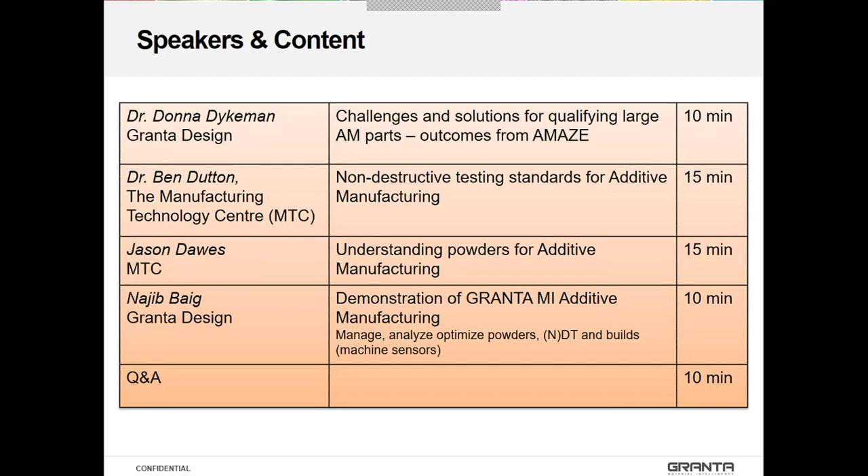Thank you very much, Steve. The title of these slides is the challenges and solutions for qualifying large AM parts, some outcomes from the AMAZE project. The purpose of the next few slides is to give an overview of the AMAZE project, its purposes, and the challenges it addressed. We won't cover all the outcomes of AMAZE today - this is just a snapshot of work that Granta and MTC worked on. We'll come back at the end of the webinar and share resources to help you find more information and connect with more partners.

To introduce AMAZE: this acronym has been around for several years, standing for Additive Manufacturing, Aiming towards Zero waste and Efficient production of high-tech metal parts. This is the largest and most ambitious metal additive manufacturing research project in Europe, funded to the level of 18 million euros on behalf of the European Union's Framework 7 program. Because it was focused on demonstrations, it was also funded in part by industry. The project was 4.5 years long, starting December 2013 and closing in June 2017 with an open forum held at the MTC.

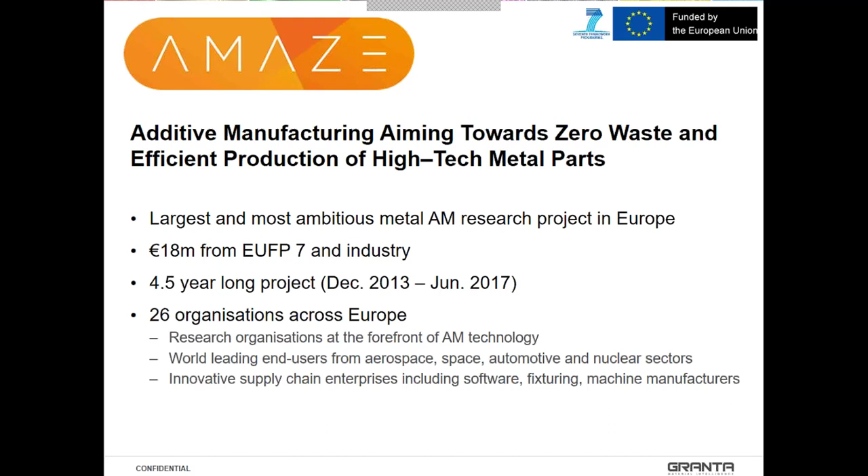The AMAZE partnership consists of 26 organizations across Europe. I'm just going to flick to the next slide while I talk about the partnership so you can have a chance to absorb exactly who was present.

AMAZE brought together a representation of the leading institutes and enterprises in Europe for additive manufacturing. To start with, there's a good presence of research technology organizations and universities who worked with partners on fundamental research problems, as well as how to translate these solutions to industry use. Secondly, we were well represented by world-leading end users who brought their business cases and challenges to the consortia, representing the aerospace, space, automotive, and nuclear sectors. Thirdly, we had strong supply chain representation from designers, software developers, machine manufacturers, post-processing, NDT and metrology, and fixturing.

The project aims overall could be summarized in four short statements, although there's a lot of work going into each of these. They are: increasing the build rate of AM processing, extending part size and complexity, improving part quality, particularly by reducing defects and scrap, and widening the range of proven materials for additive manufacturing.

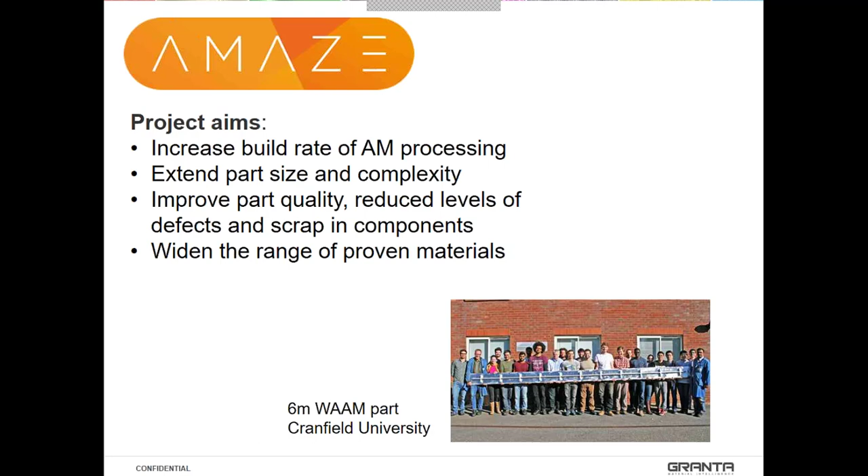The benefits of additive manufacturing really don't need to be widely explained today, given the work done globally on this topic over the past decade. They are widely acknowledged as being geometrical freedom, production flexibility, efficient use of materials, and material freedom.

I'm showing another couple of the demonstration use cases that came out of AMAZE. One is the Thales satellite sun sensor, which was originally made of 3 tubes and was redesigned for geometrical efficiency, reducing the amount of material by about 52%. There were very significant environmental and cost impacts that followed from those decisions.

The other one shown here was made by the UK Atomic Energy Authority, a copper and vanadium component, both of which are typically difficult by additive manufacturing, but they came up with a way to do it. What it gives them is a lot of flexibility in the field, and these materials are particularly needed in their harsh environment in the energy sector.

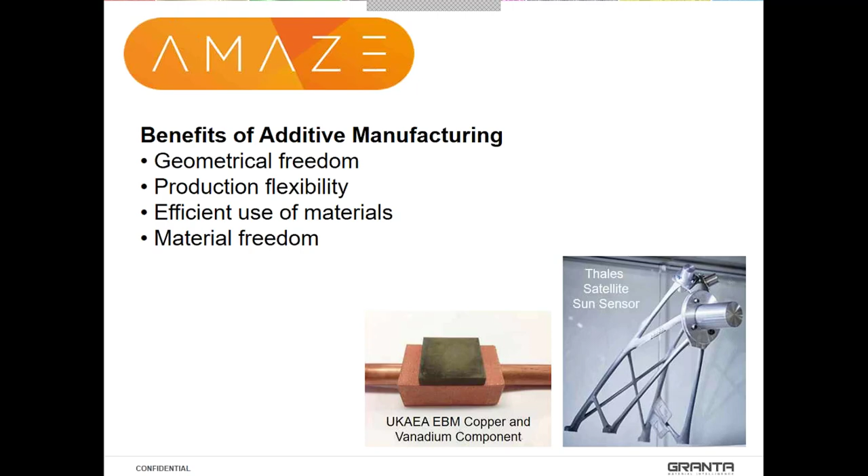Moving on, some of the barriers to introduction of AM for production highlighted by our partners even at the onset of the project are what we aim to address. One is the limited range of proven materials and associated mechanical property data. There is data out there which we have as product offerings, but the industry as a whole acknowledges there's a lot more work to be done to get qualification-level data available to industry.

We would say there's probably still a poor understanding of opportunities and requirements for design for AM. Obviously not all parts are AM applicable, and there's also a lot of value add in terms of finishing applications and repair applications that AM can offer.

There's limited knowledge of fundamental principles which underpin the AM process. A lot of work was done in the project looking at the melt process, measuring and modeling it, which is very important for improving resource efficiency and improving feeds and speeds.

Another part of this knowledge base is what's happening with your feedstock material, and that's what we have the MTC here to talk about today. The quality that comes in is going to be reflected in your part quality at the end as well, and this important part shouldn't be forgotten.

Finally, given those barriers, it's fairly self-evident that a lack of industrial case studies to demonstrate the process benefits and limitations is available in the public literature today. AMAZE really targeted that opportunity, and it looked at 15 different use case studies where parts were designed and produced.

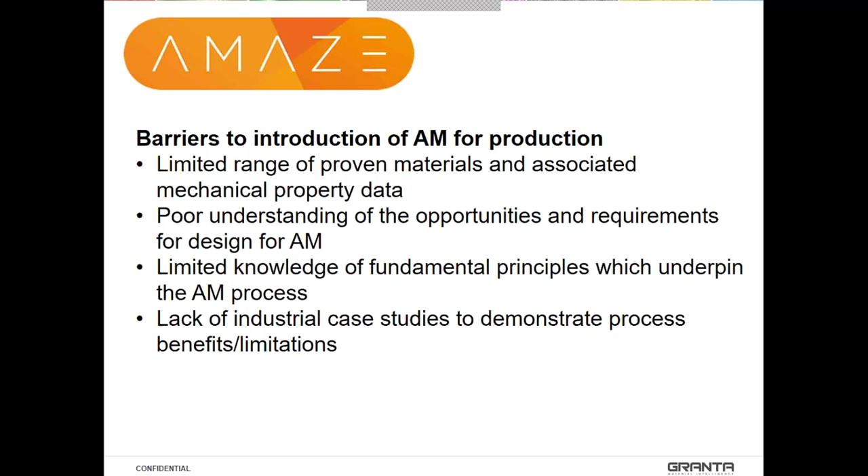The AMAZE objectives overall were to produce large AM metallic components, increase process productivity, reduce defect scrap levels, reduce cost of finishing parts, and improve in-process and ex-situ inspection methods. I'm showing another part here below, a pylon bracket. It actually underwent laser polishing, which was developed in the project, and it also underwent some more design optimization techniques as well.

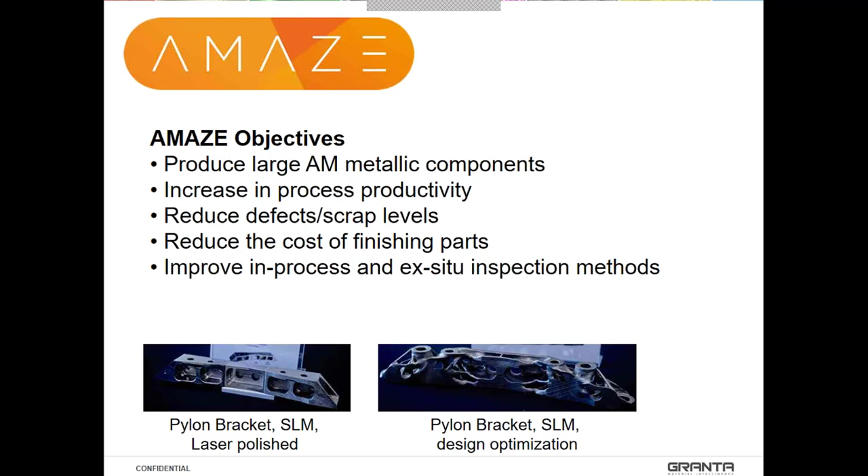So the scope of the project was structured around the limitations that industry had brought to us as a challenge, and also the critical objectives I talked about earlier. The result was the development of a robust end-to-end additive manufacturing process chain. The components of that process chain are part design for AM, materials research, high productivity AM process development, process modeling, process monitoring and control, finishing of parts, final inspection, and developing integrated and streamlined AM factory solutions.

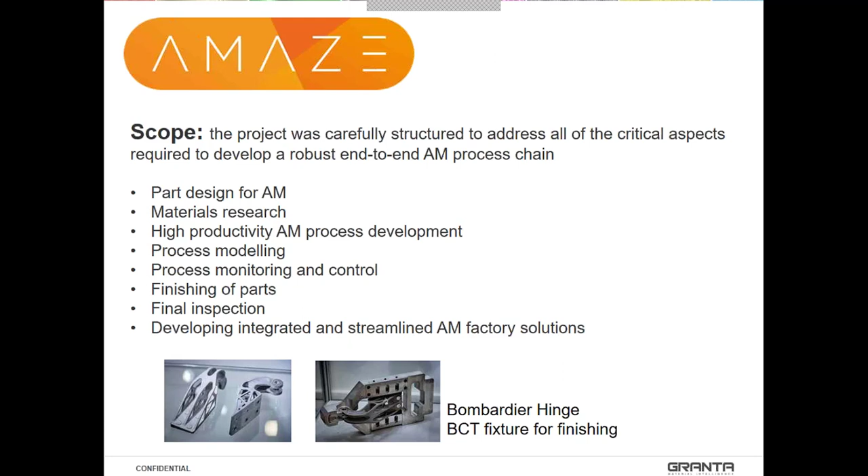So what we're going to talk about now for the rest of this session is some of the outcomes developed by the MTC and Granta, and how they overlapped onto this end-to-end AM process chain. In the materials research area, there's the feedstock characterization and control for qualification work that the MTC has done, as well as NDT and metrology applications for process monitoring and final part inspection. For Granta's part, we hosted a centralized materials data management database for the project, which looks at an industrial level application of materials information to support factory solutions, and also captured all the information through that end-to-end process chain for the project, which will have a life after the project, as we'll talk about.

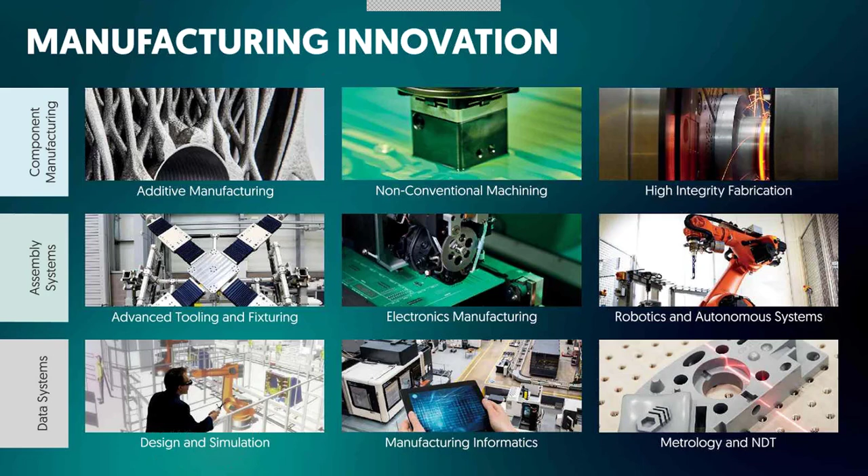The MTC is divided into three main large groups. One includes additive manufacturing, non-conventional machining, high-integrity fabrication - that's for component manufacturing. Then we have assembly systems, which includes advanced tooling and fixturing. We have a big group on electronics manufacturing. We also have robotics and autonomous systems. And the last one at the bottom is data systems, which includes design and simulation - we have a nice VR room and other related equipment - and informatics, manufacturing. Where I personally sit is in metrology and NDT, the last one on the bottom right.

About additive manufacture, we do quite a bit here at the MTC. We're the home of the National Centre for AM, and we have end-to-end capability, from design, powder characterization, to fully finished high-integrity components. We are a risk-free independent environment, meaning we're not tied to any particular company. We are a member-based company, but we are independent, and that's one of the advantages we have - we can give free advice that's not tied to any particular company.

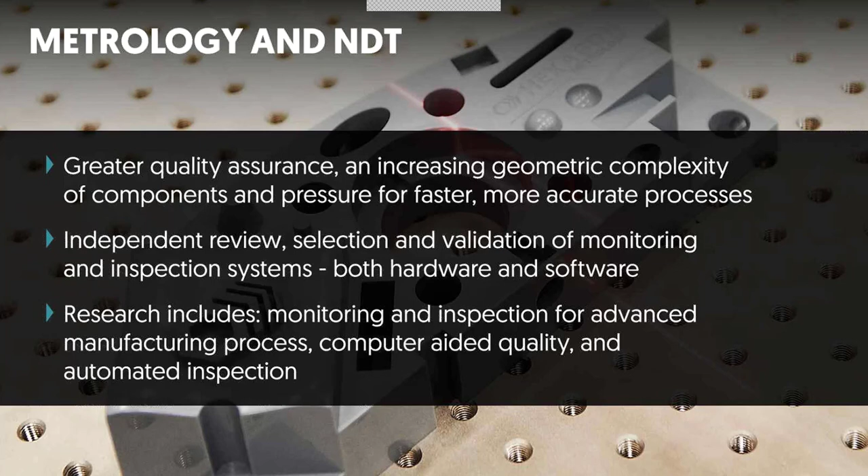So just a bit more now into the group I belong to, metrology and NDT. My background is NDT, and what I'll be talking about now is NDT. We have quite a variety of expertise and project work that we cover.

Now, right into the actual subject, which is NDT standards for additive manufacturing. Additive manufacture is a great tool and way to design very complex features or parts, as you see in some examples there, and there are even more complex lattice sections designs. But for NDT, that is a headache basically. There's particularly the freedom of geometry, and added to the roughness of the finished parts, these are causing challenges to the NDT.

There's a need to improve NDT, or to have novel NDT basically. Some of the main areas that, from our knowledge, require standards are aerospace, automotive, and medical. There are others which also do, but those remain what we believe.

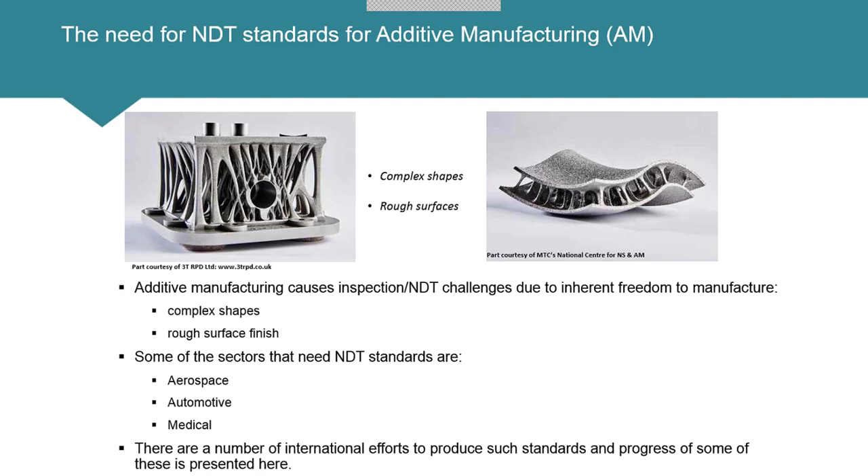There's a number of international efforts producing such standards, and a big one is the one that I'm leading. I'll be presenting that here, and mentioning another one that's also participating. The standard I'm leading has a big long name, as you see on top. It's basically a joint effort between ISO and ASTM, and our activities go through BSI, the British Standards Institute. The standard is going to come out from both ISO and ASTM, and I'm the convener.

This is a best practice guide, as we're starting to define it, because that's typically what you do when you don't have a very well-defined method to inspect a very complex part. AM is so complex that NDT methods can vary quite widely. So it's a guide which represents potential, and then tested, NDT methods to detect defects which are not covered by current standards. I'll explain what that means.

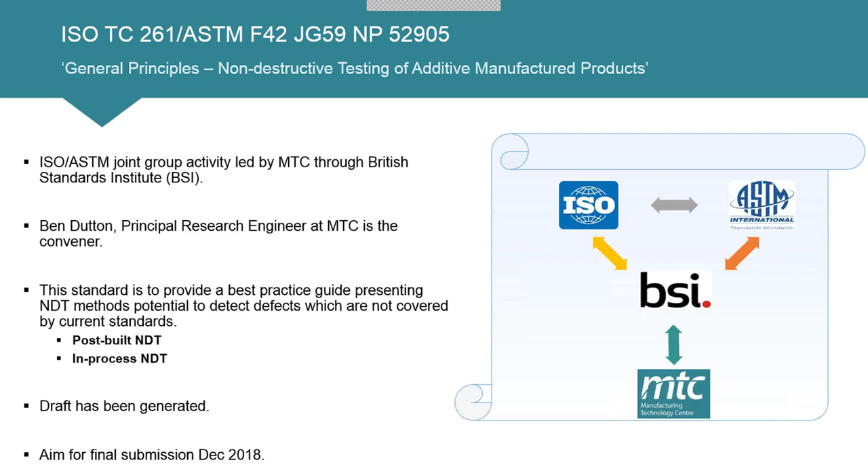It covers both post-build and in-process NDT. The first draft has been generated, submitted, and approved as a project, and the aim for final submission will be around December next year.

A couple of slides on the types of defects, which we've generated mainly from research projects at the MTC, and most of them also from AMAZE basically. So these are some of the defects that we find, only believed to be in additive manufacturing.

These are typical powder bed fusion defects—some electron beam melting, some laser powder bed fusion. This is to highlight defects like cross-layer defects, shown in these X-ray CT images. It's a vertical cut on the left and a build layer slice on top, just to show the morphology of defects which typically don't occur with other methods.

Then you've got layer defects, and we also have powder bed issues: trapped powder and unconsolidated powder. Trapped powder is powder that, due to the geometry it was designed with, gets trapped, and it may or may not be a problem, so we may need to detect it. Unconsolidated powder is powder that you meant to melt but, for some reason—process errors—didn't.

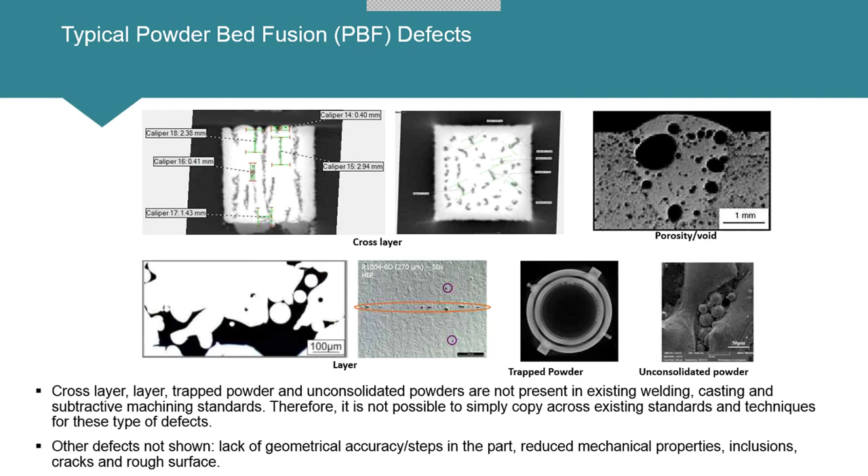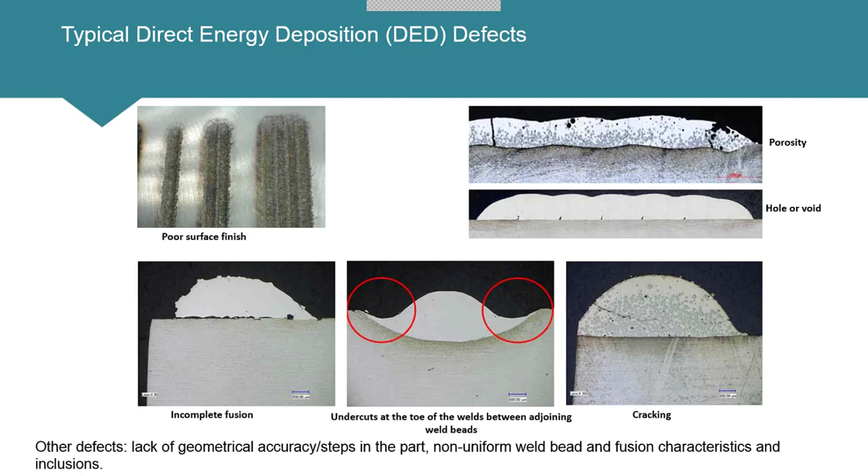Now in direct energy deposition, these are some examples of the types of defects that occur. You typically get poor surface finish, then porosity, then undercuts because of the size of the beads typically, and you could have incomplete fusion and cracking.

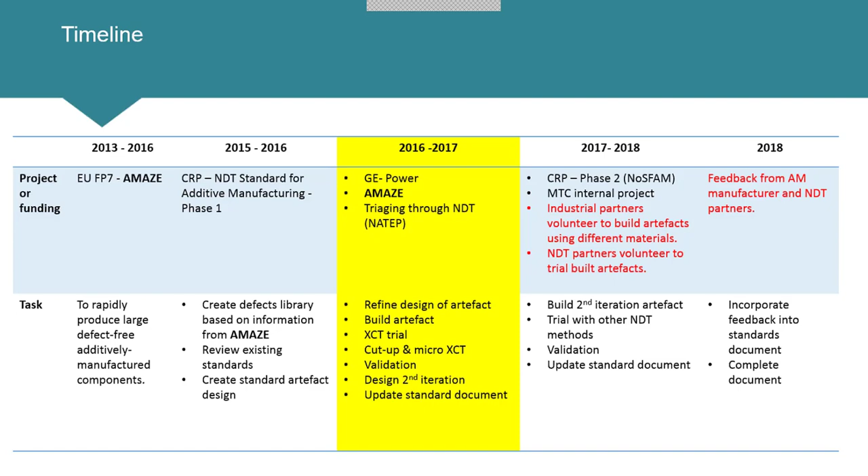More detail on the scope and definition of the standard: we look at the types of defects that additive manufacturing generates in both powder bed fusion and direct energy deposition. We reviewed current standards, mainly welding and casting. Welding has similarity to direct energy deposition, and we saw it has similar defects, so we believe most DED defects can be covered by current welding standards. Powder bed fusion has more unique defects, which compared to casting, we believe some can be covered by current standards.

Provided we can validate them, but also considering the finish of the part and the geometry, which typically in casting cannot be that complex. And then you have the very unique defects, which need very specific standards.

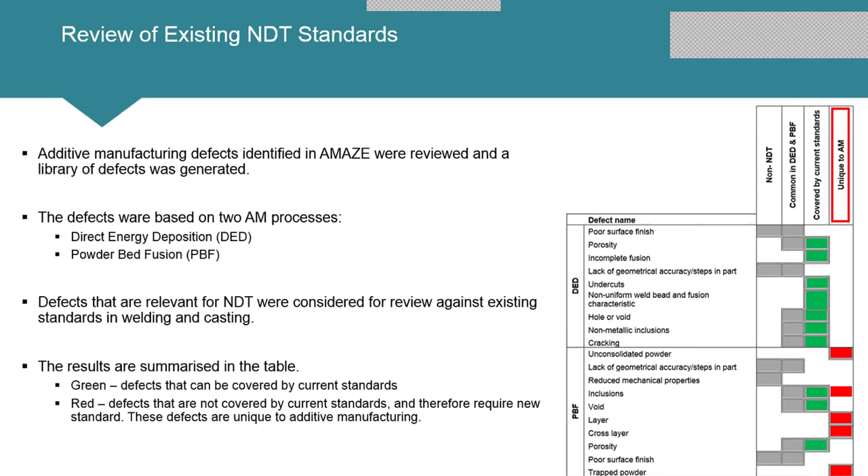So the structure of this standard is as you see in this slide. Depending on the part, the level of quality required, and acceptance level, some of the defects can be covered by the current standards, which is the blue section. For defects depending on acceptance requirements, some will need new NDT standards, which are the new standards that will be developed.

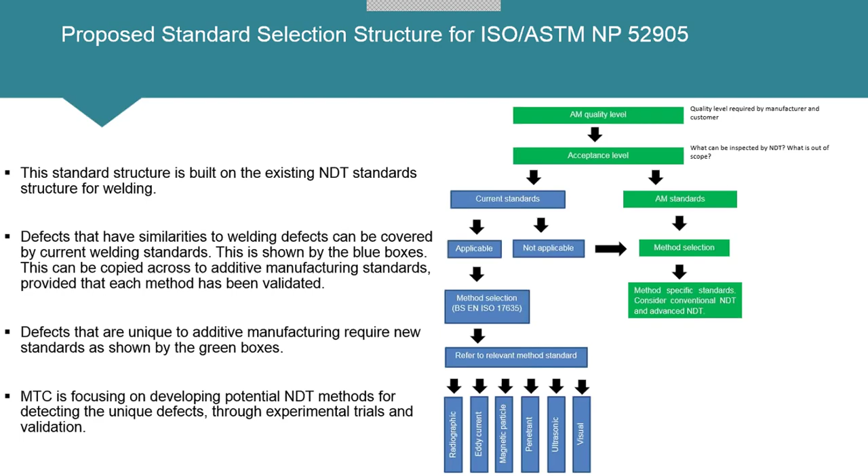Apologies for the size, I don't know if you can read that. I couldn't fit it all in, but this is something that will be included in the standards. This is a table showing the potential of NDT methods for each of those unique additive manufacturing defects. The size of the green bar is the estimated potential for detecting that particular defect using a particular NDT method.

We made it an estimate, which we could modify based on the roughness of the sample. In this case, it's the worst case. Typically, electron beam melting is rougher than laser powder bed, and there's also geometrical complexity. So here we put the worst case, which we believe is lattice structures. This is a matrix we generated which depends on the level of surface roughness and geometrical complexity—it'll give you different outputs.

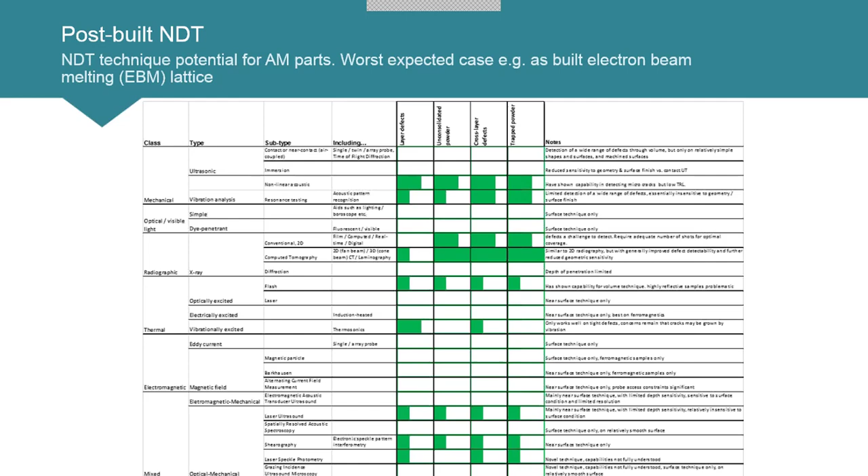Now, for the standard, we have created an artifact, as you see there. This covers the post-build NDT section, and we decided on something somewhat complex, but with areas we can define with different kinds of defects. In some areas we have horizontal cylinders, and then we have vertical cylinders.

Those were seeded, mimicking the types of defects which are layer defects or cross-layer defects vertically. Then we have spheres, which is basically trapped powder, and cylinders, which are trapped powder at different angles. This design is dependent on the material because we're trying to optimize for X-ray CT, basically with a 10% transmission rule.

Then we have the actual builds that we have done, one for Inconel and one for titanium. We have a number of those artifacts, and the sizes are relative—it is the true proportion basically. So titanium would actually be larger because it's less dense, because of the rule we're following for 10% transmission.

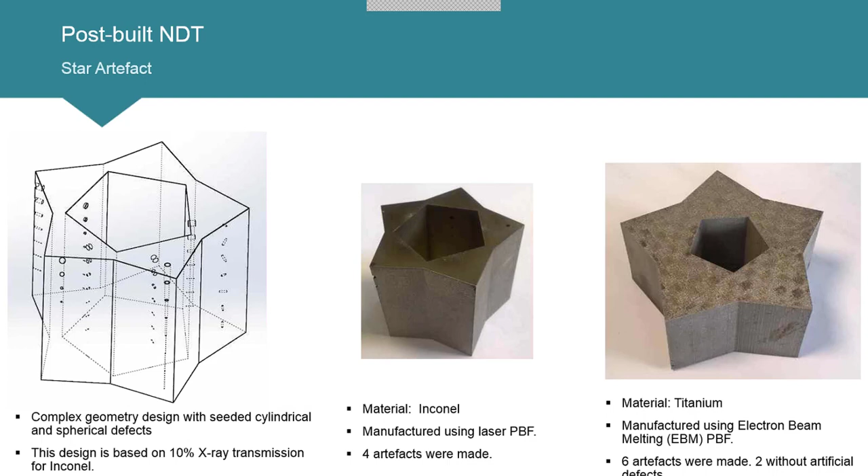Next I'm going to show you just one example, because otherwise I would take several hours showing you some of the results that we have, some of which will be included in the standard. This is X-ray CT, different projections of the artifacts which were scanned. There were one, two, three, four stacked stars, as you see on the top right stacks, and then the 3D image on the bottom right.

Then just a slice of where those vertical cylinders were concatenated, and we can see that the three largest ones were easily detectable. The one about 200 microns started to get more faint. But we've also cut up some of those, and that 200 micron feature is much better detailed than you see here—that's due to the limitation of the X-ray CT resolution. So that 200 microns is possible to detect, it's just not as clear as shown here.

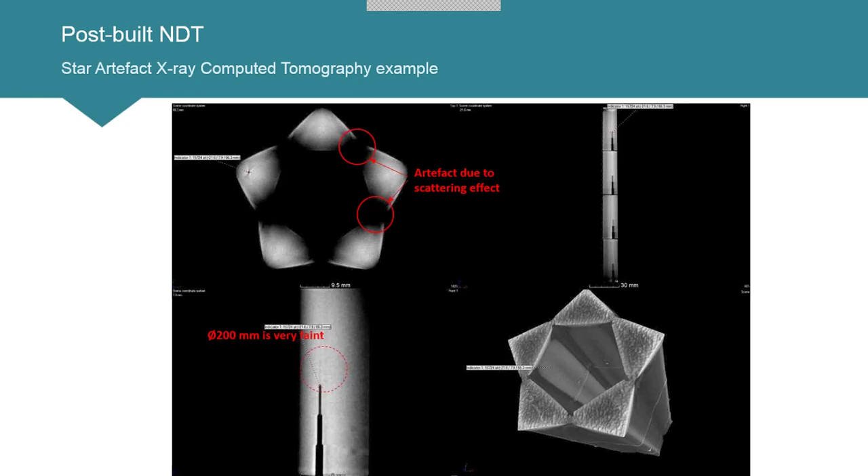Some other thing I'm highlighting is that X-ray CT has some difficulties, let's say, with artifacts. In this case, I'm showing artifacts due to the scattering of the sample. This is a very dense part, which makes these artifacts more visible.

The other thing we are also considering in the standard is that we have these artifacts, but perhaps in most cases, depending on the geometry, it will not be representative of that particular part you're building. So for those cases, the recommendation is to create what we call an 'a la carte' artifact, which is closer to the geometry you'll actually be building.

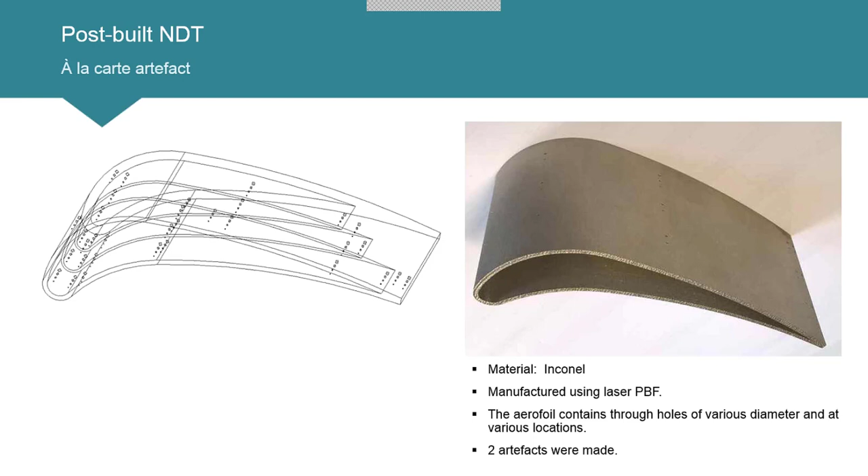This is thanks to one of the partners working with us, GE Alstom, GE Power. This part is not confidential, and it's not the geometry they are actually going to build, but it's representative of what they would like to test. So we built that and we have also X-ray CT'd it. I won't go into those details, but this is just to show that the standard is assessing the level of complexity that will obviously occur in AM.

Just a couple of slides on in-process NDT, which was developed during the AMAZE project. This is the same part that Donna showed, called output 3, the Thales part. This is an aluminum part that was built, but in this case it's showing the process was not under control, which in some way is good for NDT, because we like to see defects and test if the method is capable.

The first test on top is a crack, or in this case a surface defect, which is a layer defect because it's along the build layer. So it's an opening surface crack, and we scan with laser ultrasound just before and after that defect. This was the generation laser and this was the detection laser, and both move along this direction, moving downwards here. This is called a B scan, a stack of A scans that ultrasound generates. We can see the surface Rayleigh wave very clearly, and then some effect of that crack.

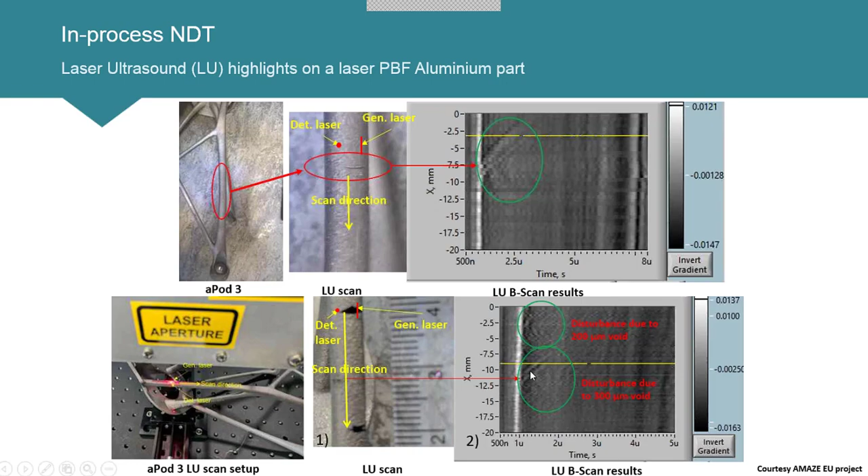The other example from the AMAZE project is a plasma transfer arc system with wire feed, with at least two beads deposited in parallel. I asked for the sample to have representative defects, and they told me there were sections with some lack of fusion between the beads.

What I'm showing here is again the B scan, and this is the direction of the scan. One laser was on one bead, the other laser was more or less on the peak of the other bead, and here's the B scan of that. The scanning is from top to bottom, and this area has a large effect on the delay in the Rayleigh - the surface Rayleigh wave - but there are also some features here which I believe are due to deeper defects.

I presume these are from possibly porosity or lack of fusion between the top and bottom beads, or the top bead and the plate. This shows a large difference in the A scan between when there's a defect and when there's no defect. So this laser ultrasound system is showing capability for both powder bed and for the potential for in-process inspection.

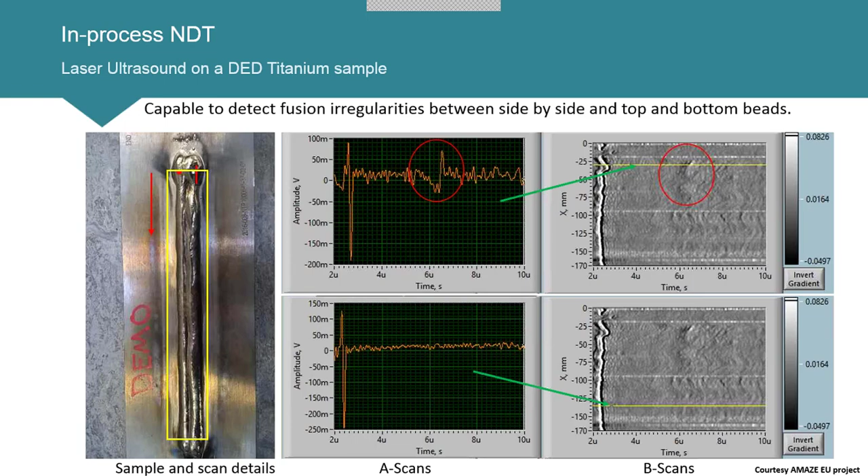In general, the contributions of AMAZE for these standards are the joint group which I'm leading, the new work item proposal 52905, joint group 59. I'm also participating, and the types of defects were used on the ASTM work group E07.

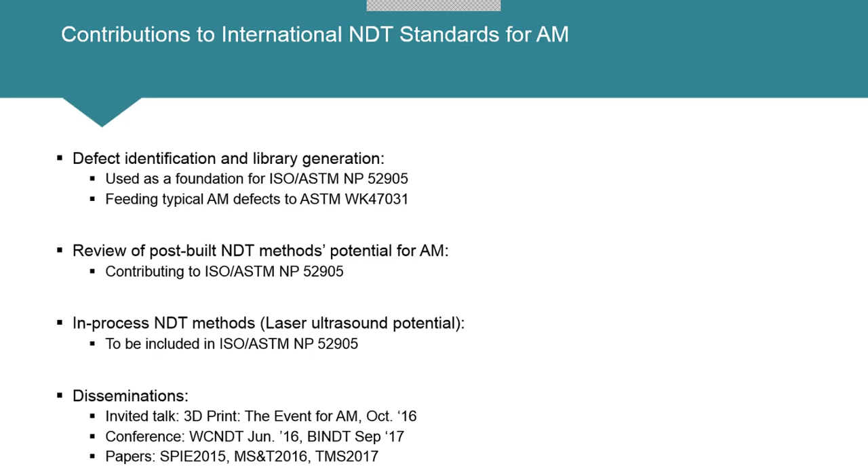Obviously AMAZE has also been useful to review the inspection methods and the process, as I just showed you, and obviously also some dissemination, as you see at the bottom.

In conclusion, MTC has been leading the development of NDT standards through ISO and ASTM, and a lot of this has been due to the advantage of working with the AMAZE project. But I believe more effort, and ideally joint effort, is required to provide what this industry or these sectors urgently require.

Without NDT standards, there are obvious difficulties in certifying and verifying parts - it's quite an issue. The challenge for NDT is that we require novel methods to cover both post-build and in-process inspection. In-process may have the potential to reduce or eliminate post-build inspection - at least that would be the best solution or goal to aim for. So, in addition to novel methods, improving the existing ones would perhaps be the solution.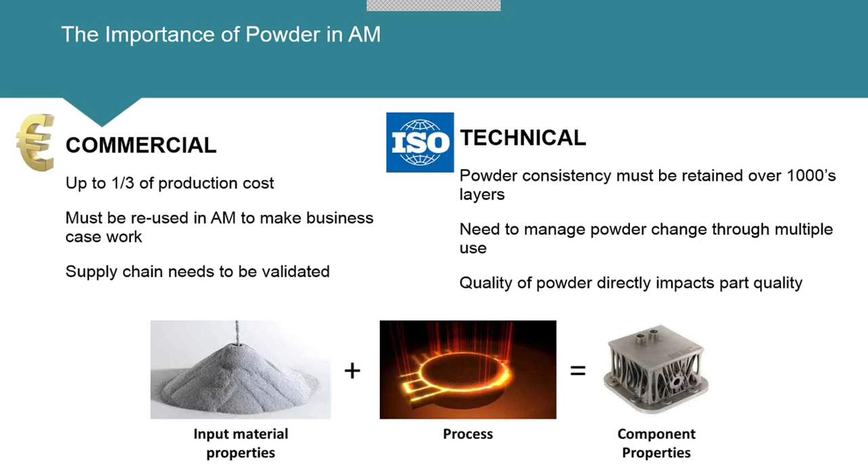Eventually you will pick up too much oxygen, you'll be out of spec. So you've got to understand how to manage the reuse of powder in the AM process. And then, of course, you've got the old adage where quality of powder directly impacts part quality. You put rubbish powder in, you're going to get a rubbish product out.

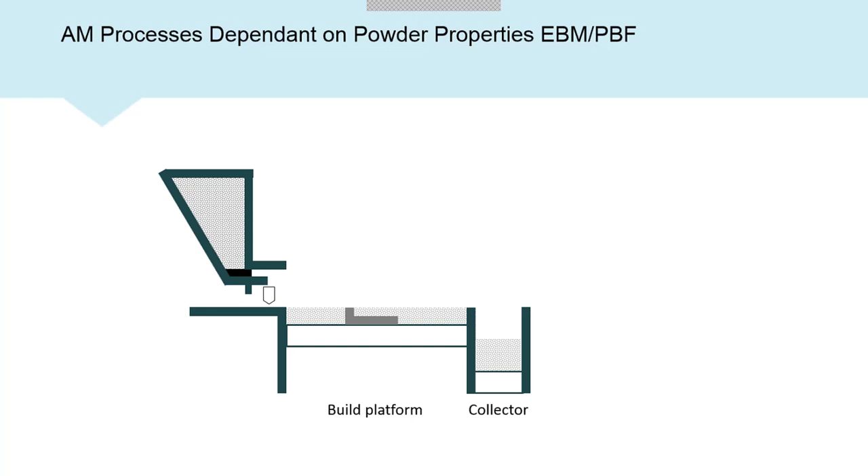In terms of the EBM process or an SLM process, I've just got a generic image on the slide that gives you an overview of what an AM machine looks like in very simple terms. If you look at the different stages of the process, you can start to understand where powder starts to impact. Firstly, you've got powder storage.

In this scenario, bulk density becomes important, because the lower the bulk density, the less material you can store, or the bigger container you're going to need to store the powder in. Moisture content, because that could cause bridging in the hopper. And then particle size distribution - ideally you'd want no segregation, so you've got the same distribution from top to bottom.

At some stage you need to dose your powder from that hopper into a dosing unit. So then I'm interested in powder flow - will my material reliably flow from my storage hopper in front of my spreader? Will I get the same amount every time? Again, particle size distribution - will I be seeing any kind of segregation, which could give me varying part property from bottom to top?

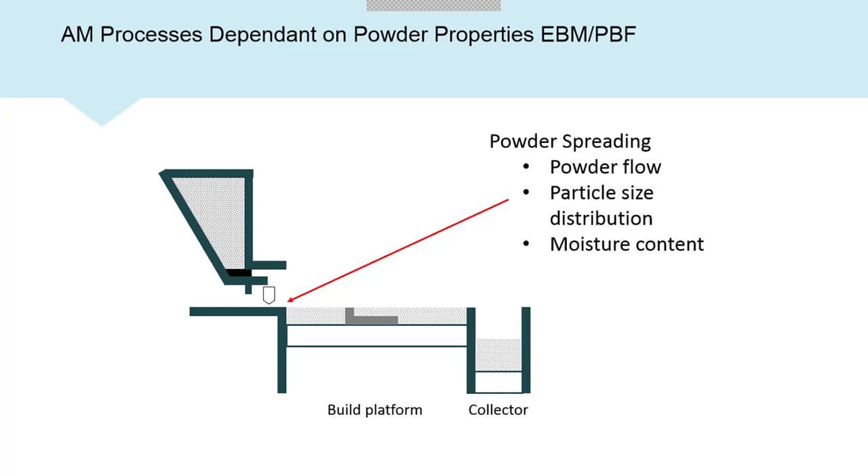I then need to spread that dosed powder. Again, what I care about now is how easily will my powder flow. Will it lock up and not spread efficiently? Will it be too free flowing and spread too much? What I want is a very nice uniform flow of powder across the build table. Again, particle size distribution, and again, moisture content, because that's the kind of thing that's going to start to affect how it flows.

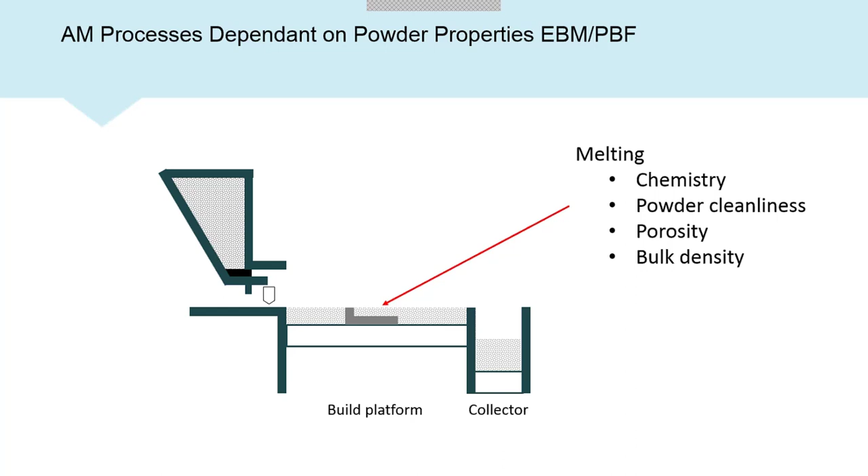Then when I actually want to melt the material, I care about the chemistry. Have I got the correct chemistry? Is my powder clean? Do I have any particulates in there that are foreign to the bulk? They're going to cause me inclusion issues. Porosity - how densely packed is that powder bed - and bulk density.

In terms of powder quality, how do we define powder quality? I like to say there's four things that you might want to measure about powder quality. Firstly, you've got your particulate properties - we're interested in particle size, particle morphology, porosity. How solid are my particles - are they solid, or do they have entrapped air in them? And of course, we're interested in the metallurgy of the particles.

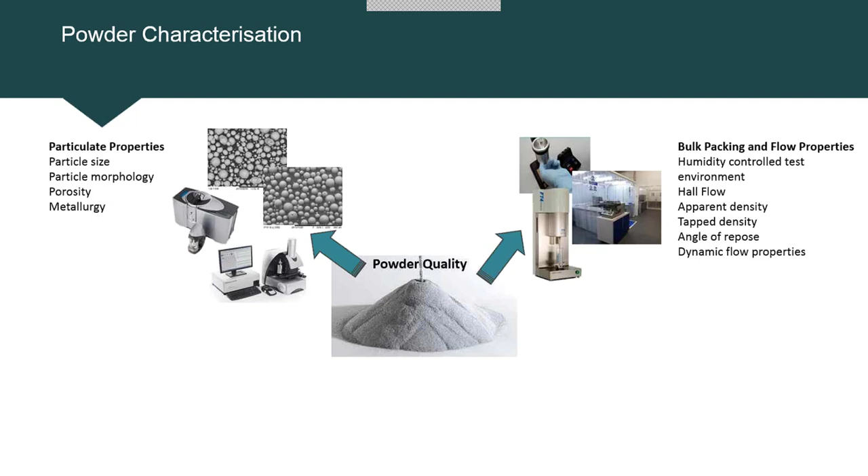You've then got your bulk packing and flow - we're interested in how those particles in assembly flow in a bulk scenario. Do they flow well? Do they pack well? Then you've got your chemistry - bulk alloy composition. Titanium 6-4, for instance, do I have the right composition of vanadium and aluminium? But also interstitial elements - do I have the right composition of oxygen, for instance?

And then powder cleanliness is much harder to define how you measure, but as an AM user, using powder potentially 50, 100 times - how many times you use it, how clean is it? Does it stay clean? Am I picking up debris from the equipment that it goes through? Am I picking up cross-contamination?

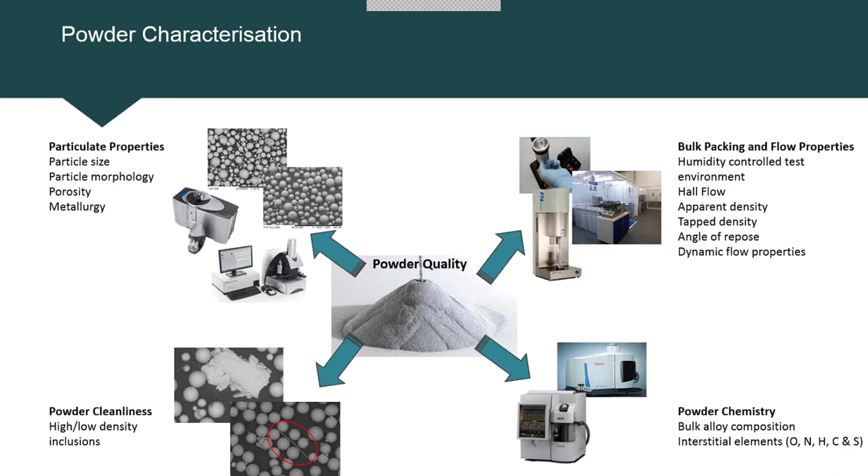So we know what we want to measure, but what are the right properties, or what do we think are the right properties for an AM powder? Firstly, you're never going to choose your AM powder based on how it flows or how it packs. The first thing is the chemistry, right? So for any AM powder we order, the first thing you want to check is that you've got the right chemistry.

Correct particle size fraction is probably the next most important. Depending on what AM method I'm using, I have very distinct size fractions. For instance, laser powder bed fusion traditionally would use 15 to 45 microns. Electron beam melting, because of the way it works, has something slightly larger.

I've already mentioned flow - ability to spread evenly. Flow is a very challenging thing to measure. I suppose today we still don't have potentially a very accurate way of measuring spreadability of powder, so that's an area for future development. We can get a good understanding of how easily it will flow from a dosing unit, but in terms of how it spreads...

Consistent bulk packing density—generally speaking, we don't know how to measure this in situ, but generally speaking, we want the highest packing density we can get. To get the above properties, generally speaking, you want a spherical morphology.

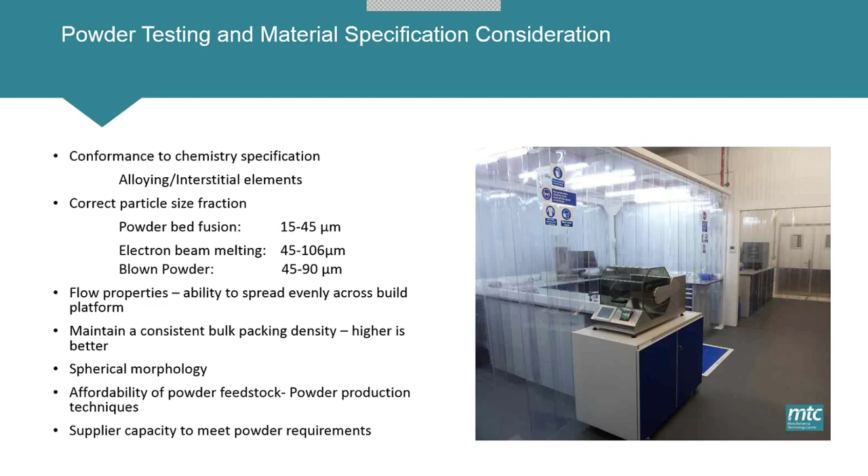So they're technical things, but then also you've got the commercial things: affordability—is my powder cost effective? And does my supplier have the correct capacity to meet my requirements?

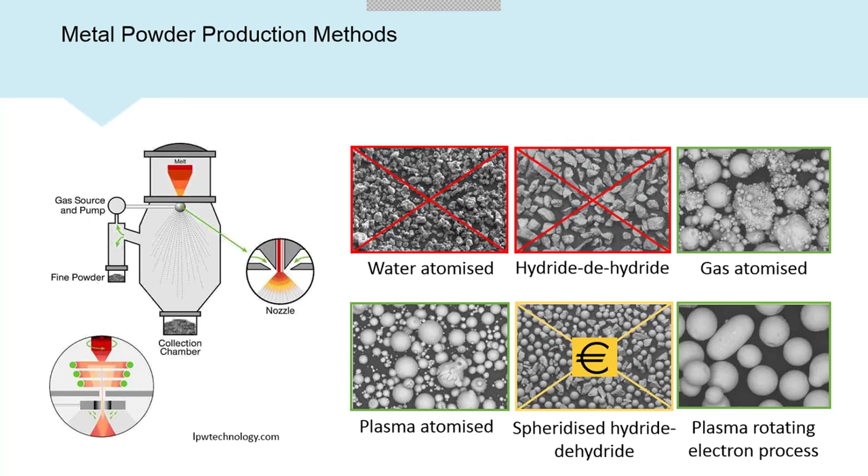Without dwelling on this too much, the challenge, as I mentioned earlier, is that there are many ways to make powder. Fortunately, based on what we think we need for AM, only a few are suitable—like plasma atomized and gas atomized methods. Other methods don't make the right kind of powder properties or are just cost prohibitive.

So I've got a few slides I can run through reasonably quickly, looking at a case study of 4 suppliers of titanium 6-4, used for an electron beam melting application. The nominal size would be 45 to 106 microns.

Those are the kind of particles that start to form effectively interlocking structures. They reduce our level of packing, and they prevent the powder's ability to flow and spread in the dosing unit.

Another issue is satellites—fine particles that will again impede flow, but also become a health and safety risk. Some satellites can be much, much finer than the bulk—typically 5 to 10 microns—and they pose safety risks.

If we look at the 4 suppliers here—completely anonymized so you can't see who they are—generally speaking, we can start to make assertions about which powder batches are best. Morphology-wise, they're all quite acceptable, but some hit that level of sphericity better than others. Supplier 1 and 3 are really ideal—very highly spherical, very low satellites, very low agglomerations. Supplier 2 and 4 are acceptable, but not as ideal.

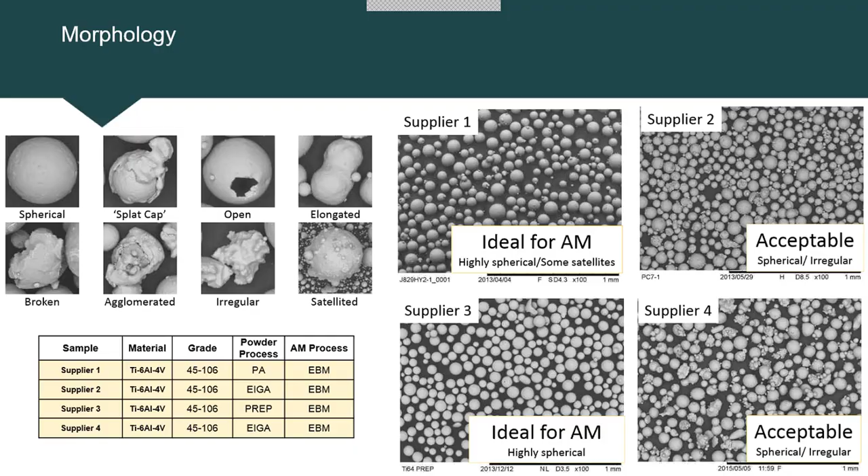Some of the things we'd typically look for: does the bulk of the distribution lie in the 45 to 106 size fraction? Is the material monomodally distributed, like all 4 are in this case? Is it Gaussian distributed? Again, all 4 are.

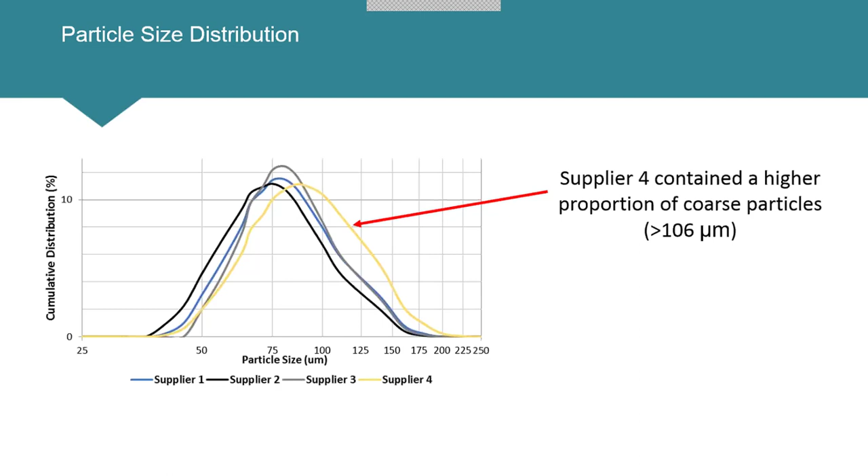So the next thing we want to look at is chemistry. I've generically picked out oxygen here for titanium 6-4—obviously oxygen is quite important. The first thing to point out is this would be a grade 5, a standard titanium grade.

So your specification for the part is somewhat higher—it would be 0.2. But because this is a powder, we need to ensure that when specifying powders, we're not buying it at the limit of the chemistry spec. We want to buy it some way below, so we can use it multiple times. The issue with ordering against the standard spec is that whether it's 0.14 or 0.2, it's still in spec.

Problem is I can't use the 0.2 very many times before it goes out of spec. So when we're specifying AM powder, we generally want to go much lower. Perhaps when you're buying titanium 6-4, you might want to go to the ELI grade, the extra low interstitial. That gives you a quite good margin in which to pick up oxygen in the process.

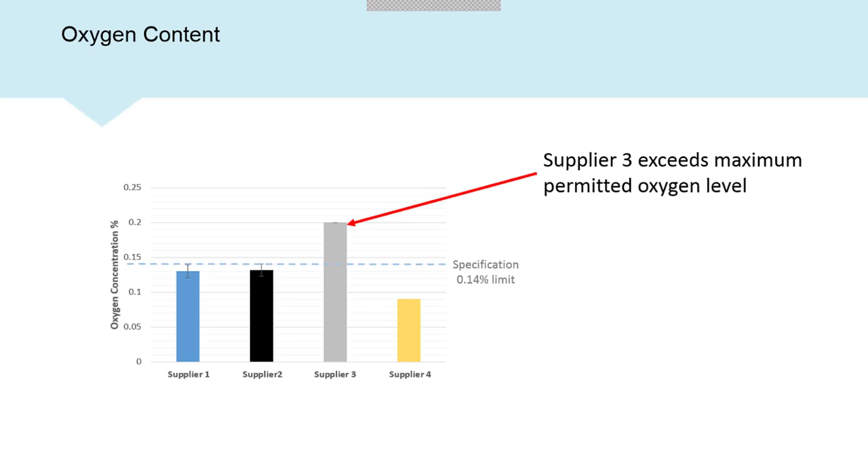In this case, we find that supplier 3 seems to be something more unique with that particular powder production method. Supplier 3 seems to be very much exceeding the oxygen limit, even on the limit of the standard grade titanium 6-4. So for AM purposes, this is much too high.

We look at flow. In this scenario, we use a classic traditional methodology called Hall flow. All four suppliers were within what we specified as ideal flow for AM.

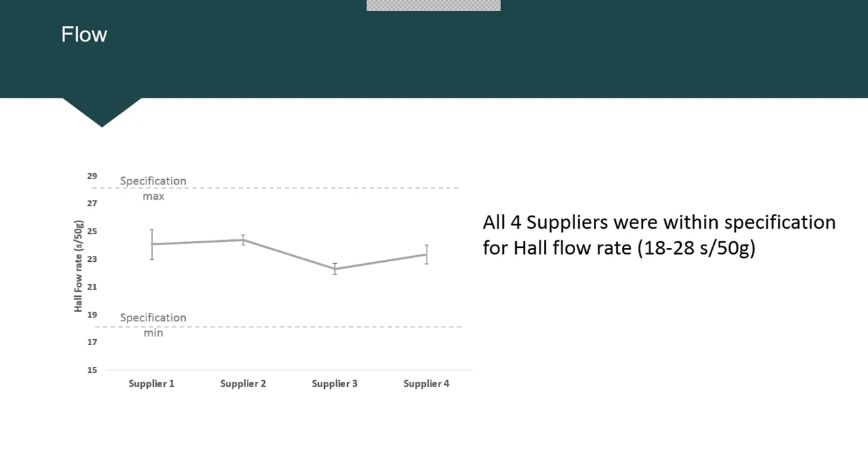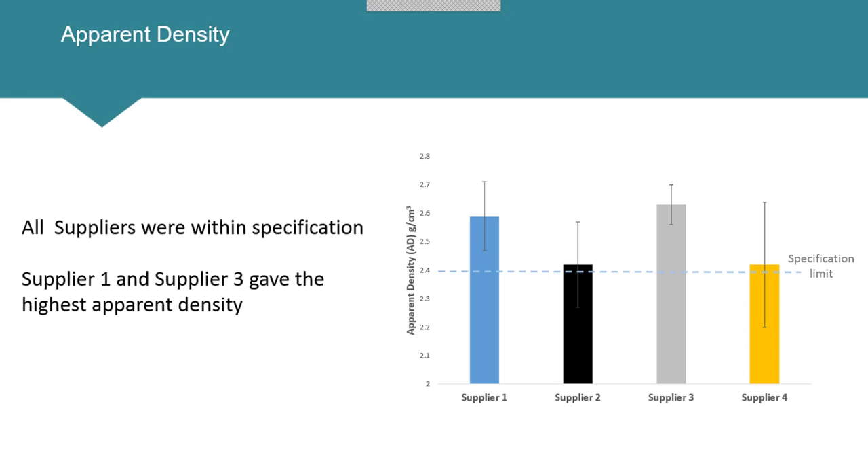Then the final thing we looked at was apparent density. In this case, probably quite linked to morphology, suppliers 1 and 3 tend to have the highest packing density, suppliers 2 and 4 somewhat lower. Suppliers 2 and 4 just peeking into the specification limit, but suppliers 1 and 3 - because higher is better - are more favourable from that perspective.

In terms of what we do with all of that data, we then try to score and define which is the best material or most suitable. We have the technical things, which is around your morphology, your PSD, your chemistry, etc. But of course, there's also the commercial things.

Within Amaze, some of the things we were looking at were cost - is it cost effective? But also location. Not all of these suppliers were European-based, so some suppliers would have scored higher because we're European-based rather than other areas of the world. Generally speaking, once you've got multiple suppliers, you want to specify it against both technical, all the properties, but also the commercial.

In this case, supplier 2 was selected as the preferred supplier to the Amaze program, and we continued to work with supplier 2 for the duration of the project. Of course, any new materials they sent - this is a snapshot of batches - any new materials they submitted to the Amaze consortium, we reran through the test to make sure they were still in the right limits.

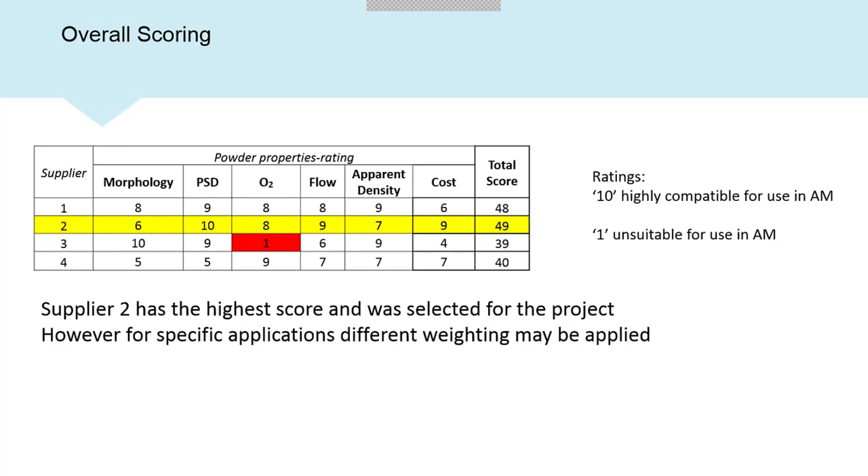So just in summary, some of the things we've been doing with the Amaze powder specification is trying to address the critical KPVs for powders. Again, 4.5 years ago, I don't think it was well known what those KPVs are. I think today we have a much better handle on what the right type of powders are for AM.

We did a good down selection of European-wide and worldwide suppliers of powders and assessed their ability to adhere to desired properties. Again, all of the powders that were put into Amaze, we checked for compliance against that spec. And then I think Najib will be talking about this, but all of the information we generated as part of the Amaze project on powder information was uploaded into the Amaze database, which is controlled by Granta. So I think Najib should have some interesting things to say about that as well.

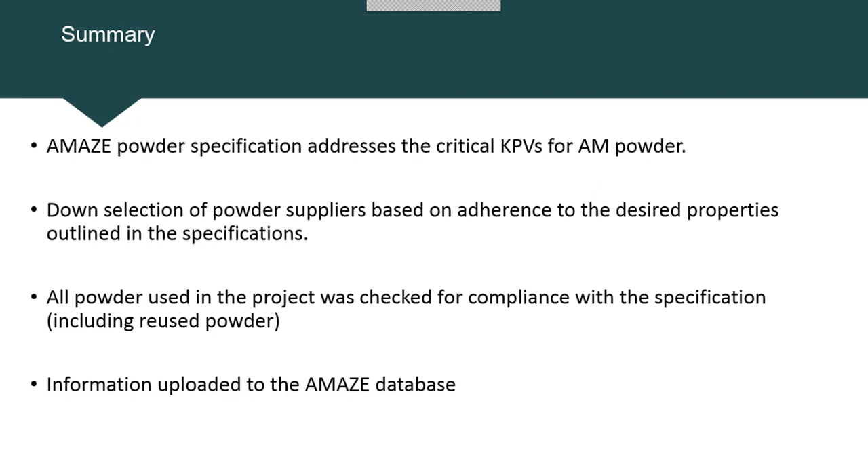So in terms of the content of the slide, that's everything Ben and I had to talk about. So I think from that we can pass.

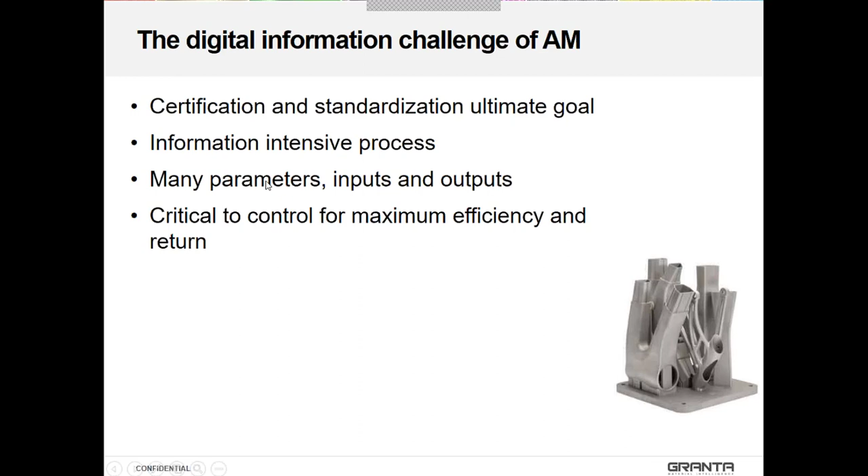That's one of the key challenges for additive certification and standardization, which is ultimately the end goal that everyone wants to achieve. This is a very information-intensive process where a lot of information is being generated. So the key challenge we want to address is how do we manage all that information? This was realized as a critical requirement and challenge as part of the AMAZE project, as you heard from Jason, Ben and Donna. But it's also important for our materials data management consortia members that include these OEMs, as well as other customer projects we're working on to help solve these challenges.

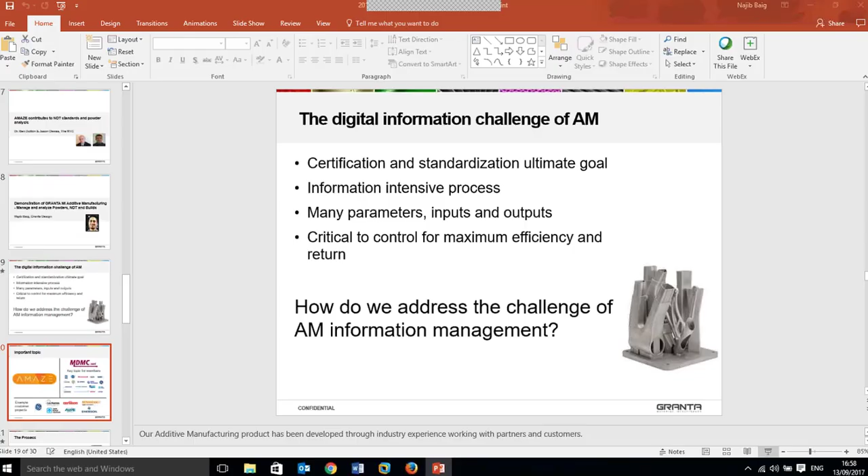So I'm going to give you a quick demonstration of a solution for managing all the different steps in the additive manufacturing process. If we start with powders, relating to Jason's presentation, there's a lot of materials characterization data generated in the process, and it's absolutely critical to ensure that you are capturing all that information.

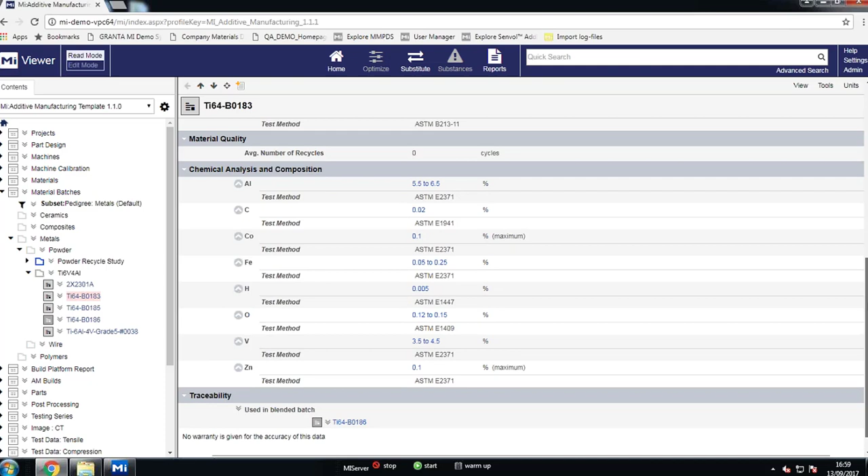Here you can see we are managing and capturing some basic information on your powder materials, the mass, supplier information, number of containers, anything important in terms of inventory management. Of course, the critical powder properties you want to capture, material quality. Jason mentioned recycling of powder materials is an important aspect, so you need to keep track of that, plus chemical analysis and to what test method those were captured.

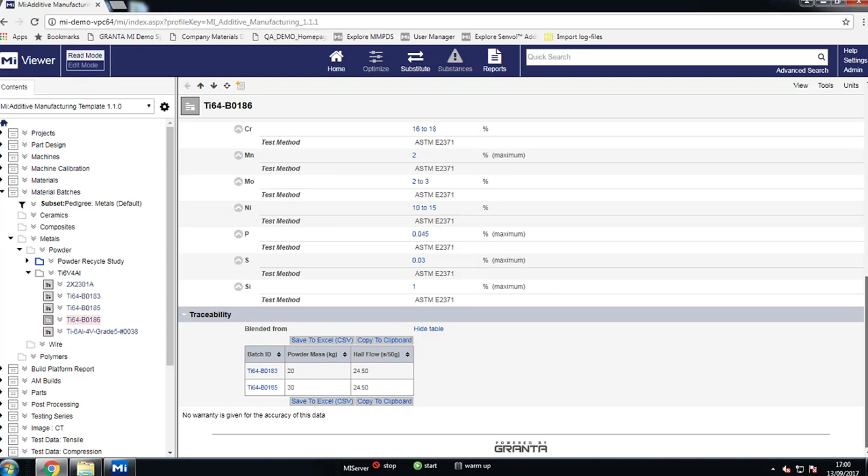Now we can also capture blended powder materials, which is done quite often. Here you can see the powder properties and chemical analysis for two different batches of powder that were blended together. It's very important to keep traceability of your information.

So from powders, you can follow all the builds that were manufactured using that powder. We're capturing all the critical information for the build, such as the drawing file, STL file, all the test data, tensile test relating to Ben's presentation, the non-destructive testing carried out on the build, parameter settings for the machine, powder used in process information, as well as any post-processing done on your part.

Looking at CT scans as an example of test data capture, we're capturing all the critical information. We have the summary image captured on the porosity. We also have more detailed image analysis in terms of defect size distribution and CT scan parameters.

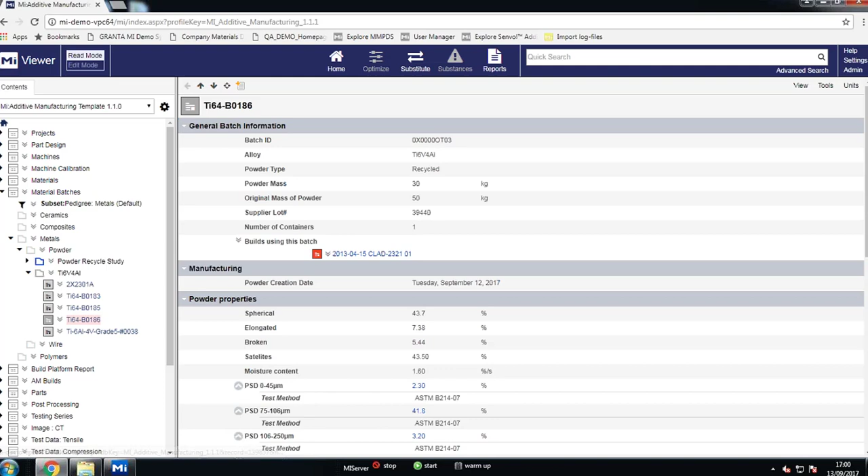It's also quite critical to capture sensor information from your machines, and I'll show you one example of doing that for a Renishaw log file. You can automate this process, which a lot of our customers do, and select the format depending on which machine manufacturer you have, ranging from Arcam, EOS to Renishaw. We do support most of them.

We can go ahead and extract the log information, that is the sensor information from the machine, and we can have a look at that information within the system with easy access and analysis.

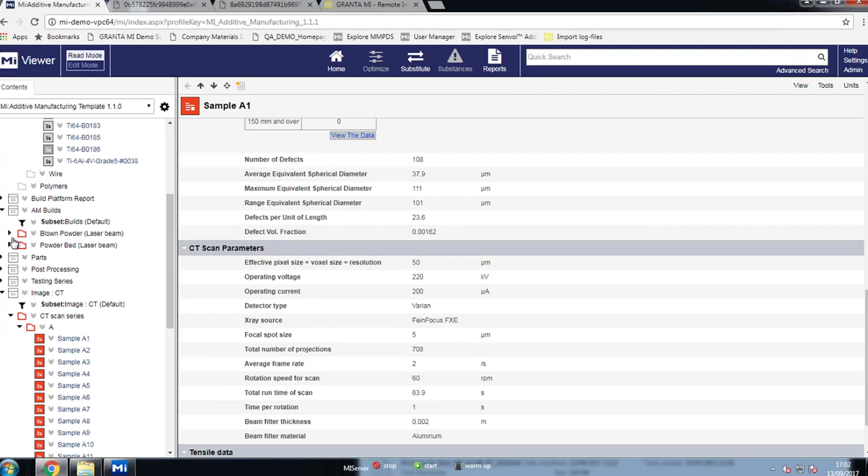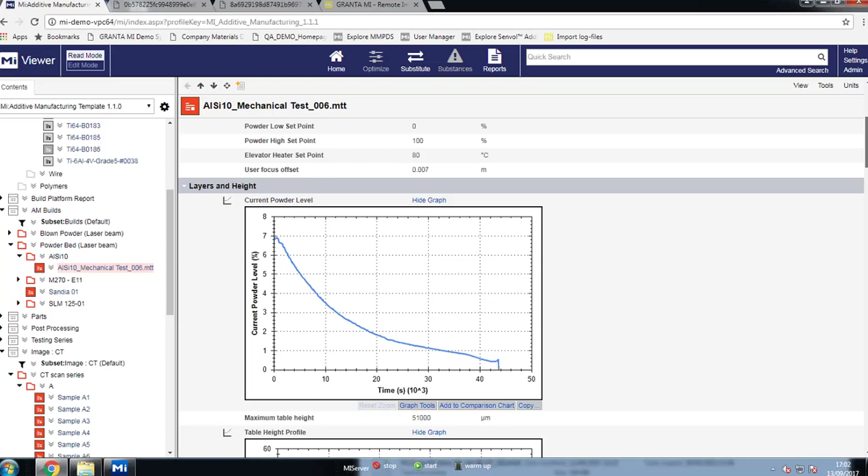So we can have a look at, this is the record, and this is the information extracted from the log file. We're looking at all the critical parameters, user settings, layer height profiles, laser temperature profiles, chamber temperature profiles, pressure, basically any type of sensor information you want to capture about your machines, whether that's EOS, Renishaw, or SLM. That's absolutely critical that you ensure you are capturing that information.

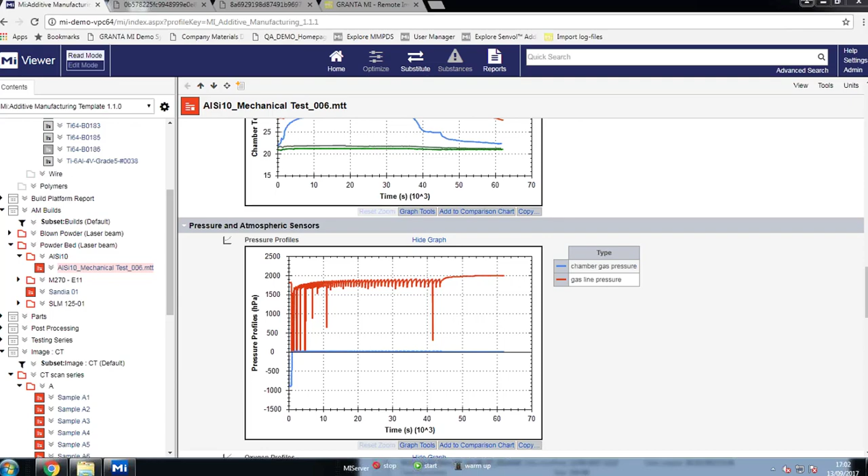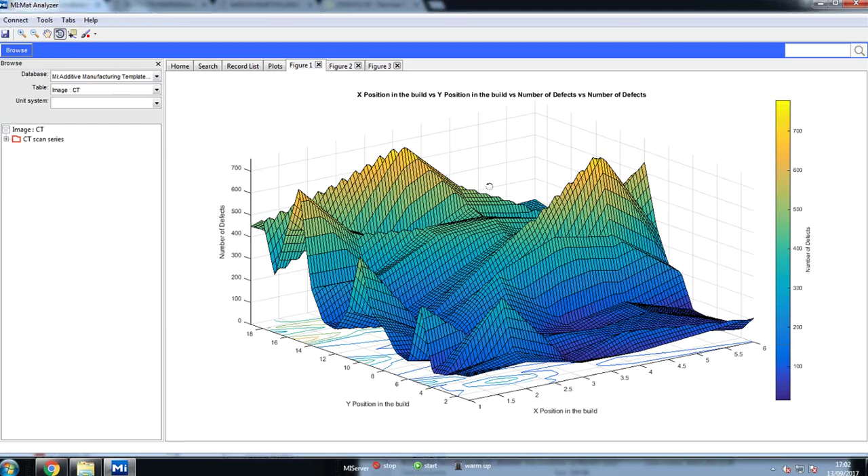Once you have the information managed, captured, and traceable, it's equally important to analyze that information, understand and optimize your process parameters. This is one example where we're looking at a plot of the position on the build, x-axis position versus y position, and the coloring here is the number of defects, so we can quickly identify where we have the most defects in our build, allowing us to quickly understand and qualify our parts.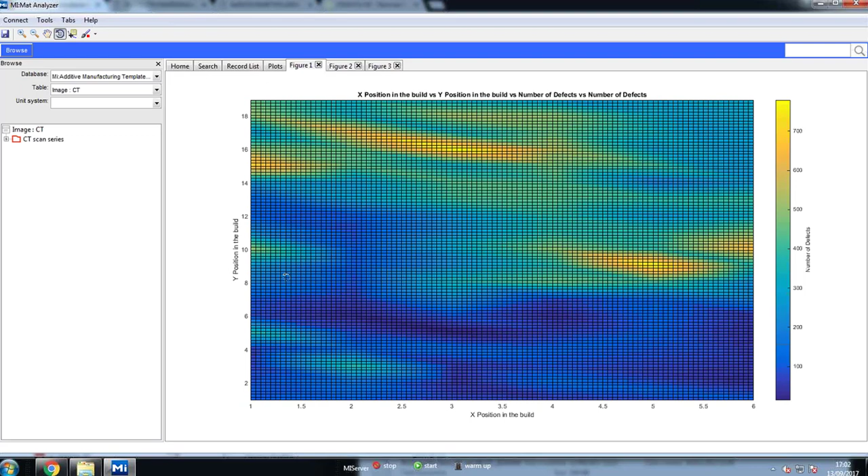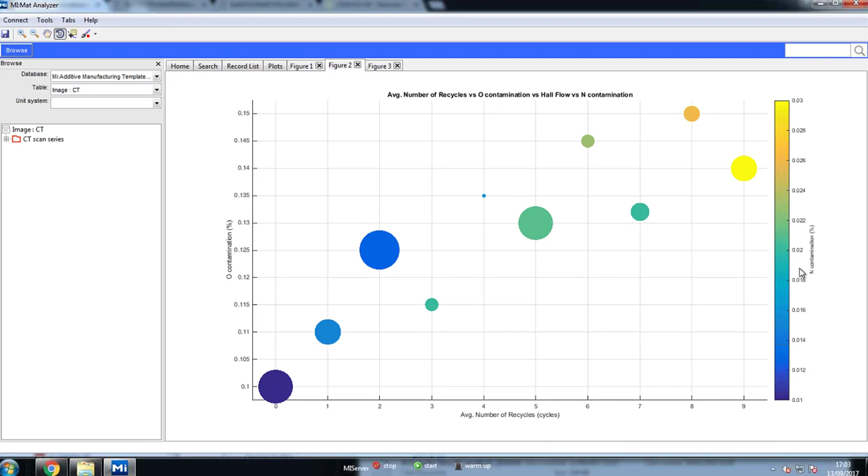Here's another example where we're looking at the number of recycling cycles against oxygen contamination as well as nitrogen contamination. And finally, here's one assessment of a process parameter, travel speed, and its effect on ultimate tensile strength. We can see the optimal travel speed is 10.5 to gain the highest UTS value.

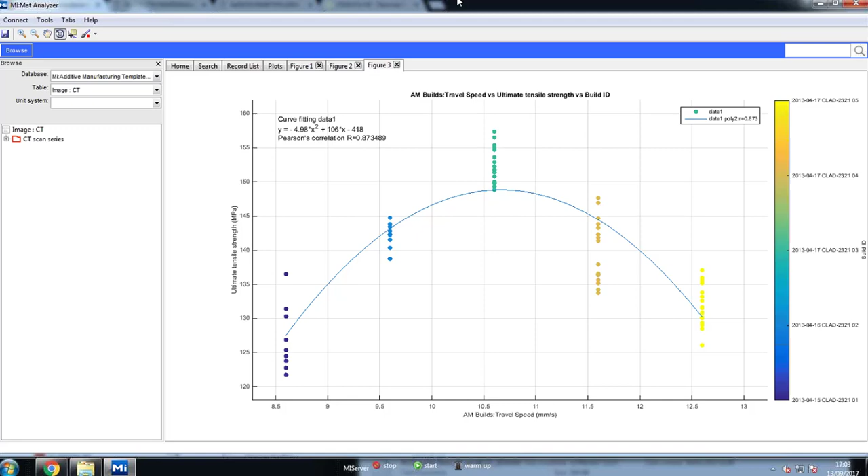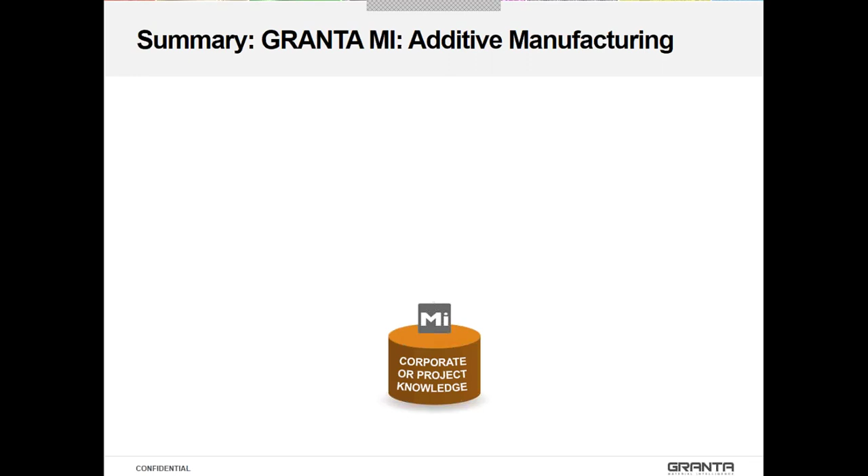As part of the AMAZE project, what was used was the Granta MI Additive Manufacturing package that allows you to capture your project data, ensure you have traceability, analysis capability on your data, support you in certification, and allow you to have an accurate business process for additive manufacturing, as with any other business process within your organization.

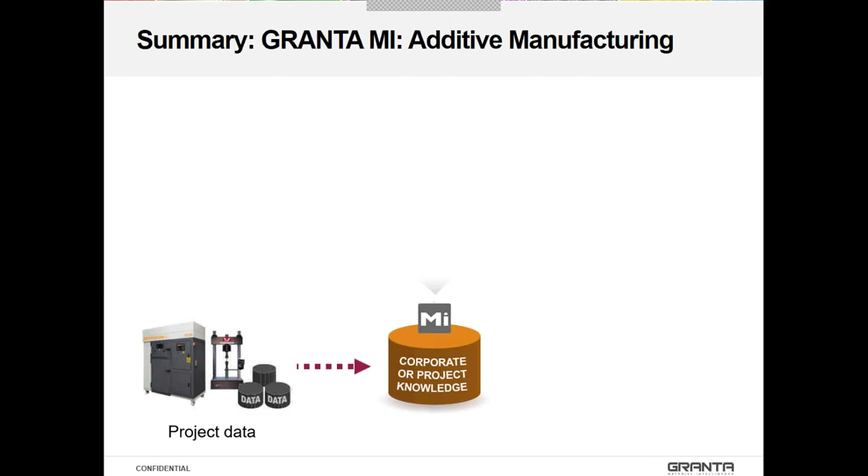For Granta, the AMAZE project was an incredible opportunity to be working in additive manufacturing when it was really just starting to kick off and being adopted more widely. It gave us a great advantage commercially, in that we were able to come up with the world's first accepted schema for additive manufacturing. As Najib was just taking you through a whistle-stop tour of our database today, all of those attributes and the links between the tables and how that's organized is our schema.

And so that was tested by our partners, that's been tested by the Materials Data Management Consortia and by our customers, and that continues to grow. Something else that is a big outcome for us is the ongoing collaboration, and I'm sure that MTC can attest to this as well. So one thing we are trying to do is make sure the data captured in AMAZE has a life after the project.

The project has ended, and we have formed an exploitation board, and we are looking for more opportunities to grow that through public funding. So if you have an interest in that and you're within a European zone, please do come and talk to us about that. There's a strong AM community and supply chain engagement as a result of this project for all partners, and we certainly felt that.

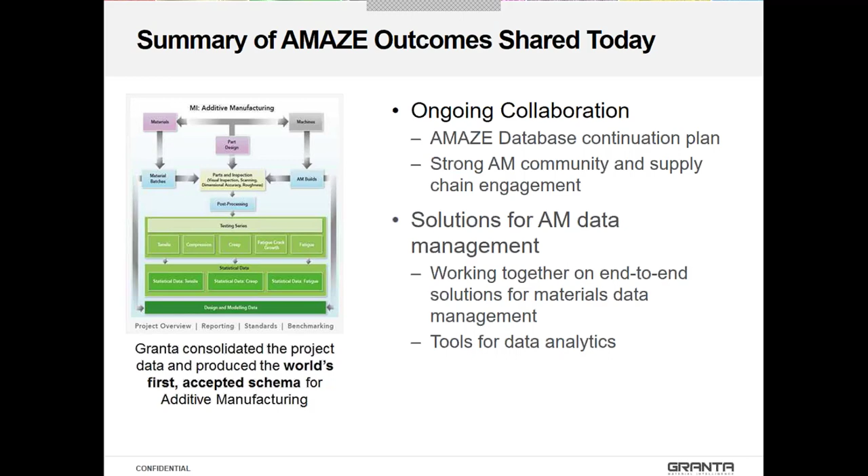So in terms of further resources, now that the project is closed, there is a lot of information available. I just wanted to direct you very quickly to the website, the handbook from the Open Forum Day, where we had one day full of presentations. Those presentations are available on the website as well, and some are available on YouTube. So you can actually hear Jason giving a more extensive conversation about the work they did on characterization on YouTube.

And of course, I want to direct you as well to the solution we've developed here at Granta for additive manufacturing. So in acknowledgement, certainly we just want to emphasize again that this wouldn't have been possible without the funding of the European Union. This is a great opportunity for countries in Europe to come together and develop solutions together, and really you don't have this opportunity very often because of the proprietary nature of the work.

We want to thank all of the AMAZE partners, which we were happy to show their logos today, and if you want to learn more about them, reach out to them, do go to the AMAZE website. And of course, to the coordinators of the AMAZE project, David Wimpenny from the MTC over the past year and a half, and David Jarvis, who was working for ESA and now works for Metallurgy Europe, started that project in its initial stage and took us to 2016.